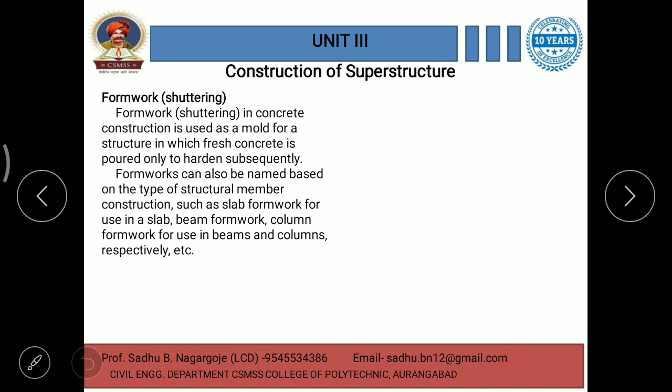Hello, let's continue with the next point from the construction of superstructure. The very important point from this topic is the formwork or shuttering. Formwork or shuttering in concrete construction is used as a mold for a structure in which fresh concrete is poured only to harden subsequently. It means it is simply a mold constructed to fill the concrete in it and to make a permanent member of the building construction.

Formworks can also be named based on the type of structural member construction, such as slab formwork for use in slab, beam formwork and column formwork for use in beams and columns respectively. These are the names given to the formwork provided by that member. When the formwork is constructed for slab casting, it is called slab formwork. In case of beam, it is called beam formwork, and for column, it is column formwork.

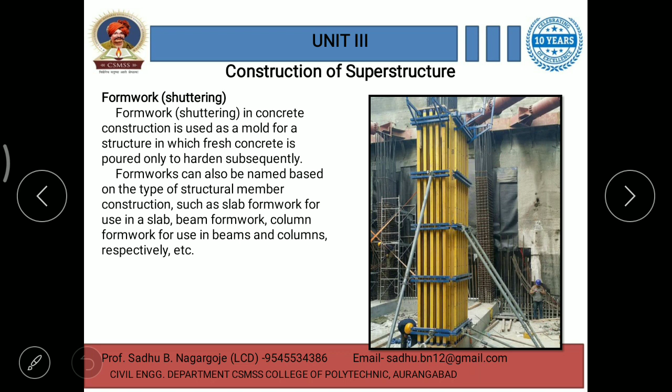So, what are the basic requirements of good formwork? It means how should the good formwork be for the construction of the permanent members. The formwork should be strong enough to withstand all types of dead and live loads. Obviously, it should carry all types of dead loads and live loads coming on the structure. Then it should be rigidly constructed and efficiently propped and braced both horizontally and vertically to retain its shape.

Then again, the joints in the formwork should be tight against leakage of cement grout. It means it should not allow the leakage of the cement slurry through it. The construction of formwork should permit removal of various parts in desired sequences without damage to the concrete. Then again, the material of the formwork should be cheap, readily available, and should be suitable for reuse.

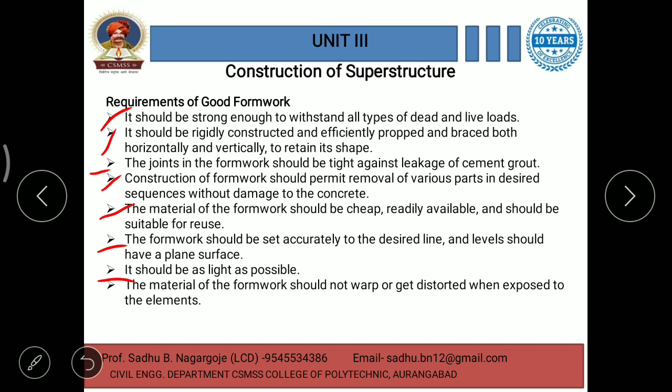The formwork should be set accurately to the desired line and levels, and should have a plane surface. It should be as light as possible, obviously, and the material of the formwork should not warp or get distorted when exposed to the elements. These are some basic requirements of good formwork.

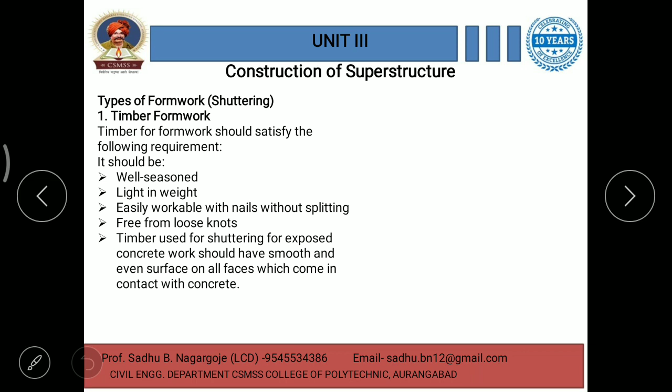Then there are some types of formwork or shuttering. The first one is timber formwork, very commonly used. Timber formwork should satisfy these basic requirements: the timber should be well seasoned and light in weight. It should be easily workable with nails without splitting. Then it should be free from loose knots. Timber used for shuttering for exposed concrete work should have a smooth and even surface on all faces which come in contact with the concrete. These are some basic requirements of timber formwork, and that makes a perfect timber formwork.

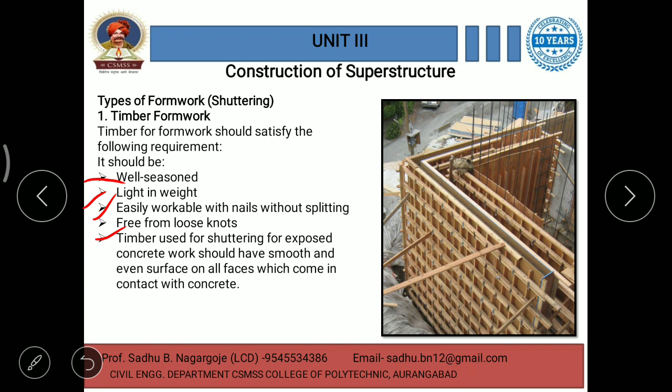Then the second type of formwork or shuttering is plywood formwork. You can clearly see plywood formwork in the image. Resin bonded plywood sheets are attached to timber frames to make up panels of the required sizes. The cost of plywood formwork compares favorably with that of timber shuttering, and it may even prove cheaper in some instances given the following considerations.

The first consideration is that it is possible to have a smooth finish, in which case there is no cost in surface finishing. Then by the use of large size panels, it is possible to effect saving in the labor cost of fixing and dismantling. And again, the number of reuses is more as compared with timber shuttering. For estimation purposes, the number of reuses can be taken up to 20 to 25. The reuses of this formwork are more as compared to the wooden formwork.

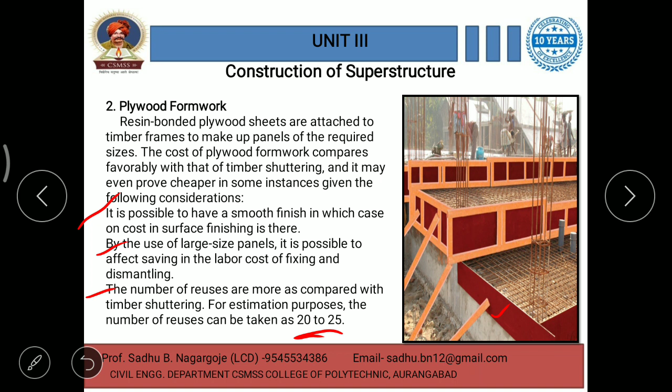They can be reused up to 20 to 25 times. Okay, then the third type of formwork is steel formwork, which is very commonly used nowadays for big sites or for large structures. This consists of panels fabricated out of thin steel plates stiffened along the edges by small steel angles. The panel units can be held together through use of suitable clamps or bolts and nuts. The panels can be fabricated in large numbers in any desired modular shape or size.

Steel forms are largely used in large projects or in a situation where a large number of reuses of shuttering is possible. In that case, these are commonly used. And this type of shutter is considered most suitable for circular or curved structures. Remember this. Steel formworks are commonly used in case of circular or curved structures. Okay.

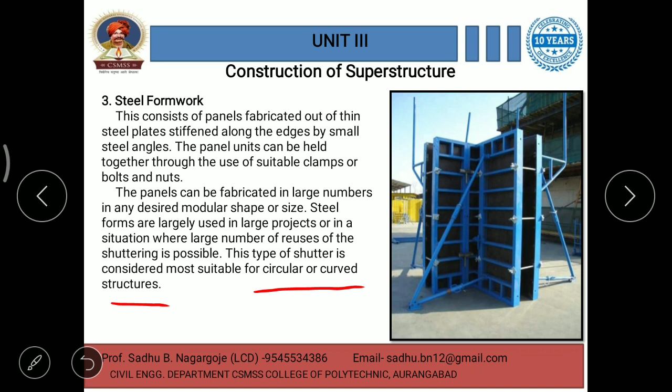Then we will compare steel formwork to timber formwork. The difference may be asked in the exam. Steel forms are stronger, durable, and have a longer life than timber formwork, and their reuses are more in number. Obviously, steel formworks are stronger and more durable than timber formwork, and therefore they can be reused many more times than timber formworks. Steel forms can be installed and dismantled with great ease and speed.

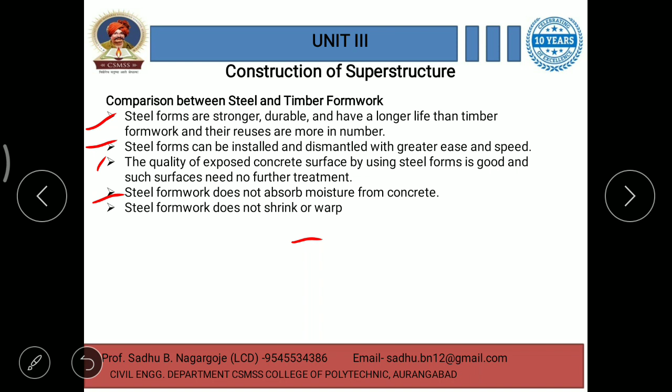The quality of exposed concrete surface by using steel forms is good, and such surfaces need no further treatment. Steel formwork does not absorb moisture from concrete. It is an important advantage of this formwork. Steel formwork does not shrink or warp. These are some advantages of steel formwork over timber formwork, and these are again some points of difference between these two.

Then, order and method of formwork removal. It is necessary to remove formwork in a particular sequence. The sequence and method of removal of formwork should be very careful. Shuttering forming the vertical faces of walls, beams, and column sides should be removed first, as they bear no load but only retain the concrete. Then shuttering forming the soffit of slabs should be removed next. Then shuttering forming the soffit of beams, girders, or other heavily loaded shuttering should be removed in the end.

Rapid hardening cement, warm weather, and light loading conditions allow early removal of formwork. The formwork should under no circumstances be removed until the concrete reaches a strength of at least twice the stress to which the concrete may be subjected at the time of removal of formwork. And lastly, all formwork should be eased gradually and carefully in order to prevent load from being suddenly transferred to the concrete. So these are some cares that should be taken while removing formwork.